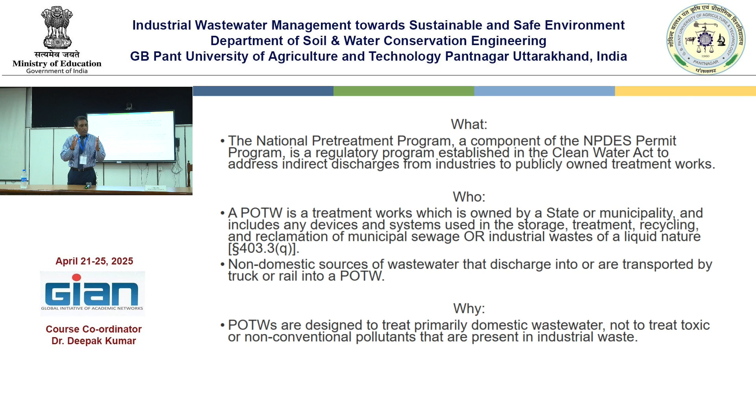That's one. Number two is when you design any wastewater treatment plant, it depends upon the type of industry existing in that area. We also saw there are two scenarios a city can do, whether it is delegated or directly managed by the administration. In one scenario, domestic wastewater from the residents is treated and discharged depending upon the location where they want to discharge. In another scenario, you have a lot of industry, and it is just not possible to accommodate with a municipal sewage treatment plant, so that is why we construct a different plant specifically to treat industrial wastewater.

We have also seen how the scenario is here. You might have seen this is a common effluent treatment plant where all the industries are located. They collect the wastewater, then they send it to common effluent treatment.

But we also saw what are the issues with the small and medium industries. They cannot afford to have a big treatment plant. There are many issues. That is why when you make regulations, when you make planning, you should also understand the other side. If they are not connected to the sewer system, if the sewer system is not capable, if it doesn't exist where they can discharge, if their discharge is not continuous, if it is intermittent, if it is seasonal — all these factors have to be taken into consideration when you design.

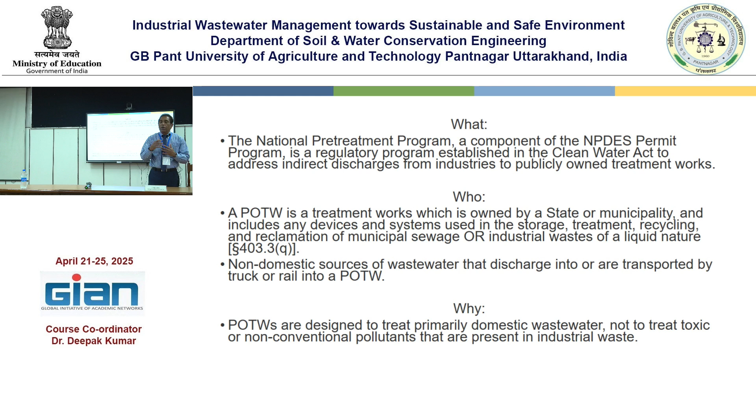That's why each city and town's design of treatment plant is different. I said the limits are developed as local limits. How they are developed not only depends on the standards of the state. That's why we give a little leeway for the city/town based on the existing industries, and the scenario they can decide, and local limits are developed accordingly. How they are developed is not a reference to the city, even though we say city local limit — these limits are developed based on the treatment plant capability. We say that these are the set limits, that's just a kind of understanding.

Then we also saw the scenarios where we have to treat the wastewater coming from the industries. In addition to that, it also develops sludge. We talked much about how to dispose of the sludge, what are the issues with sludge, what contaminants are in the sludge, how the sludge can be converted into manure, in what circumstances it cannot be used as manure, and how you remove thickener and other various components. We saw that. So that was all.

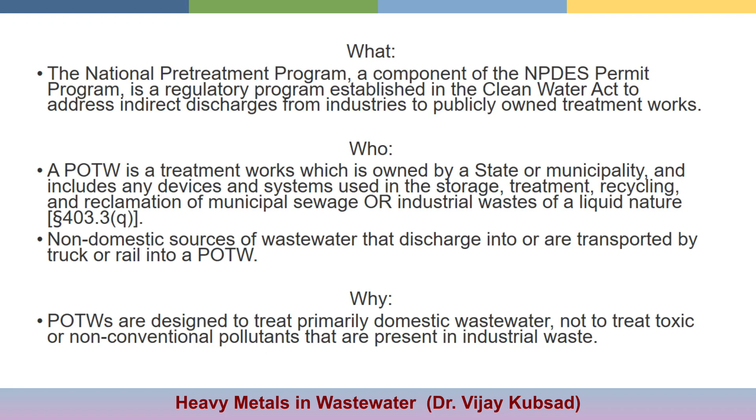But today we will see the importance of taking care of the wastewater when there is a presence of metal. Then we will go for biological treatments.

So here, if you see the national pre-treatment program, or any pre-treatment program applied to any location, statewide or the national pre-treatment program, a component of the NPDES permit is a regulatory program established under the Clean Water Act. So it started with the Clean Water Act. This is the model which they developed for the nation, then it is applied to different states, different cities, towns accordingly. So that is the treatment work which is owned by state, municipality, or includes the devices system used in the storage, treatment, recycling, reclamation of either sewage or industrial wastewater.

Liquid in nature, there may be domestic wastewater, it may be non-domestic. That's why we call it more precisely non-domestic. So any non-domestic will go there. Sometimes they say we produce wastewater similar to domestic wastewater. So domestic wastewater is that which comes from residents, then the rest is non-domestic and industrial. What is the difference between domestic and industrial wastewater?

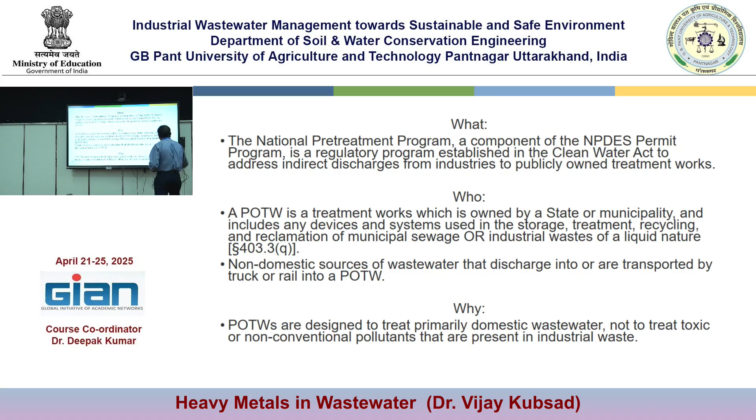When a domestic wastewater treatment plant is there, called a sewage treatment plant, we have little provision for that. That is why industry must pre-treat, removing some of the pollutants. That is their responsibility, so they can make the wastewater acceptable to the receiving community. The system is designed to treat primarily domestic wastewater, not toxic and non-conventional pollutants. That we have to always keep in mind.

Your first job as an administrator—tomorrow you will become a plant manager or a city authority—your first job is to protect. That is why I always emphasize you have to do your job correctly. Otherwise it will cause severe issues everywhere.

Toxic pollutants can affect the efficiency of the microbial process at the POTW, reducing treatment capability. Gases and vapors from volatile organics can accumulate in the head space of the sewers—you have seen that example. If industries are discharging oil and gas like that, there will always be vapors depending upon the type of pollutants and gases, and it may cause an explosion in the sewer line.

That is why you have to make sure that all industries discharging wastewater to the city have taken sufficient care. That is why you give authorization—that is the privilege. You say you will accept the wastewater, but under following conditions. That is how you confirm: you do sampling, you do analysis, you find out the data, and based on that you make an agreement—this is what we can do for it.

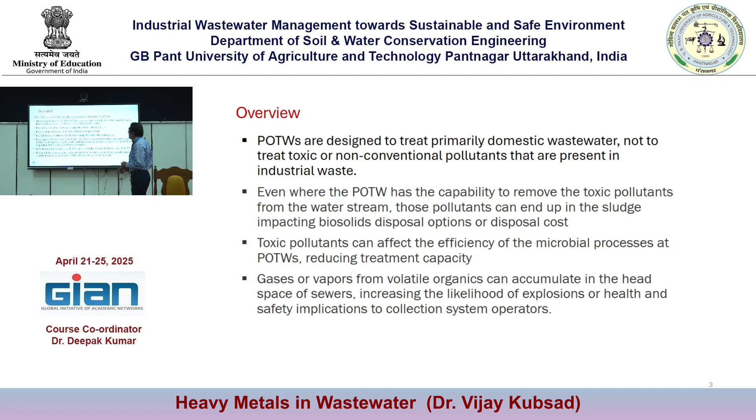Then we have some emphasis on the Clean Water Act, when it came up into regulation and what it consists of. It is the primary federal law that regulates water pollution, restoring and maintaining the quality of national water bodies, preventing, reducing, and eliminating water pollution, establishing conditions for discharge of pollutants into waters, developing a toxic pollutant list containing 65 entries deemed toxic, and we also developed a derivative list titled priority pollutants.

I spoke a little bit about priority pollutants yesterday as well. Then they published analytical testing methods to be used by manufacturers in determining the presence of chemicals and their toxicity. What does this do? If we have a law, only then can you apply it, only then can you prevent discharges—you can see the importance. So if you want to take any action, you need a clause specifying under what circumstances you can take action on violations. You just cannot decide on your own.

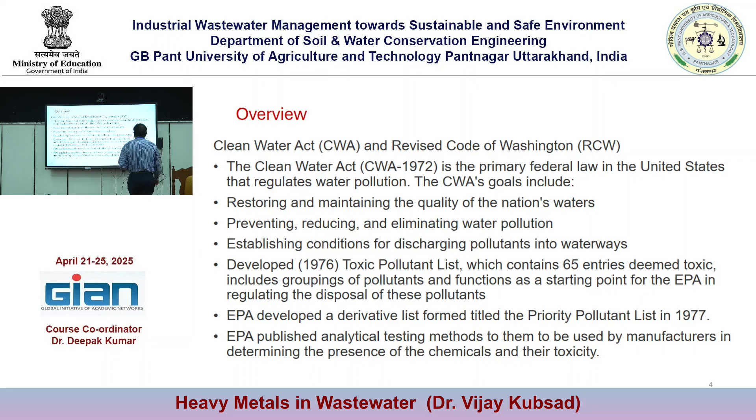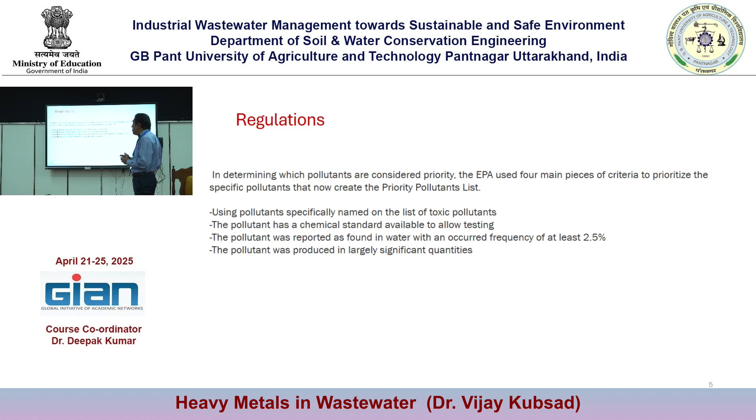Only that has to be applied precisely. So regulations give a list of toxic pollutants. If I say toxic pollutants, there should be some list, right? You need some guidelines, a manual. And what are the rules, where it can be applied, how it can be implemented, all that has been put into it, is it? So definitions, interference, pass through, and what are the other pollutants?

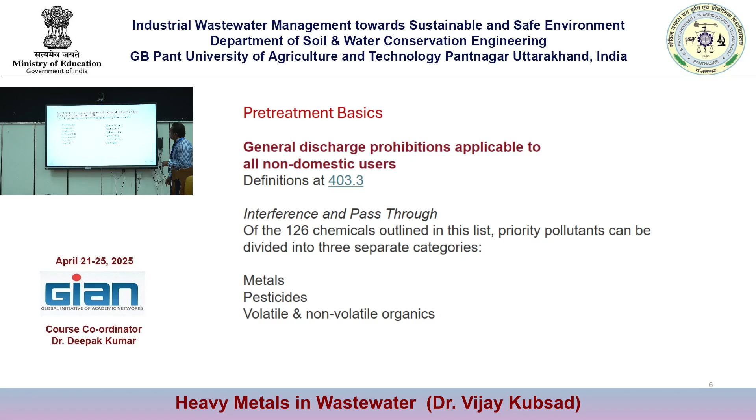There are three major categories: metals, pesticides, and volatile and non-volatile organics, right? What are the common toxic metals which can cause detrimental and harmful effects both to the environment and human health?

Right? We talked about some of the contaminants, metals. Yeah, one of your colleagues was talking about chromium. A couple of people are working on chromium. See, if that is present in the wastewater and not taken care of, what will happen? It will start destroying the whole system that has been built. That is why it is very important.

So I want to go a little step back. Earlier, what used to happen is, you might give an example - we used to drink river water. So you might have also heard about stream purification. Whatever treatment you are doing here, it all exists in nature. We have a sedimentation tank there, we have aeration. When the depth decreases, it becomes aeration there. When there is a big deep pond like terrain, it acts as a settling tank. Everything is there, is it? That is how it used to happen.

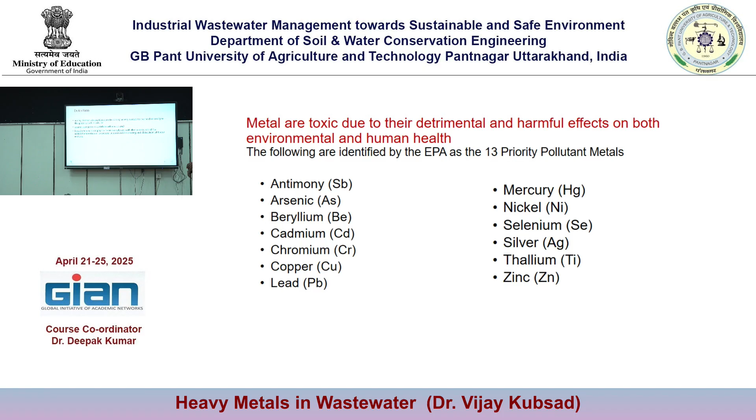Detection using atomic absorption spectroscopy - yeah, we have given a little bit about how these metals are analyzed, and what equipment is used in the system. Gas chromatography - I have used this gas chromatography for many years. If the concentration is small, most of them are doing PhD, masters, right? You might have used this kind of equipment. So these are the equipments widely used in the analysis.

And also you have a guidance document which has been developed - standard methods, okay? Standard methods. And now there are pollutants we do not know how to analyze. Those are not there in the standard methods. Still, we are trying to find out which must be the appropriate method to analyze.

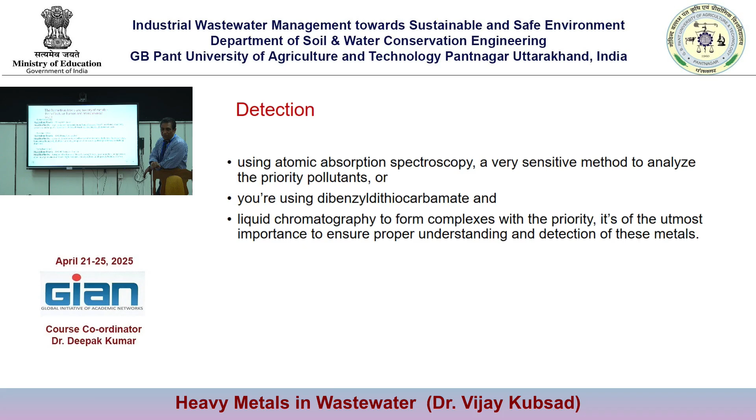Hazardous level, toxicity of the metal, and their effect on human environment - I have told you, I have one slide where you can see what is the effect, what happens, right? So you can see the effect of these metals if they are entering into the environment, into our ecosystem. What are the side effects here? Right? So you know about arsenic, somebody was talking about arsenic also. Right? Arsenic hazardous level...

Antimony hazardous level is given. Health effects, you can see - we're all inviting these kinds of health effects. So unless you fix it, how much medical infrastructure do you want to develop, keeping these things in mind, right? That is why the role of people involved in the environmental field carries a lot of responsibility.

People are getting more attention. That is why wherever you have the opportunity, you should be able to speak, make people aware, implement the regulations, educate the people, understand the latest technologies which exist or are developing, so that you can implement them.

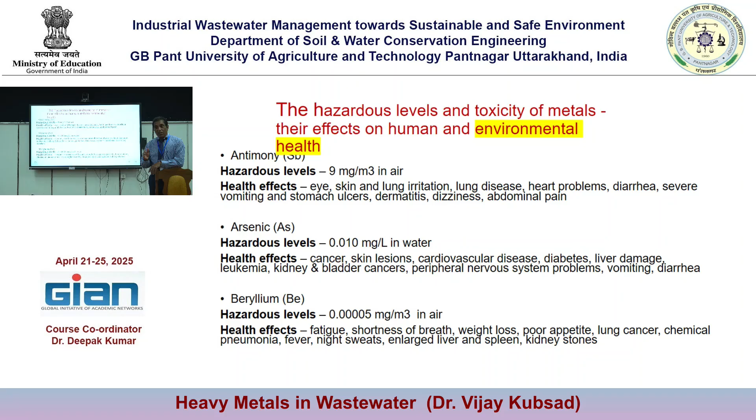Arsenic is also a big problem in major areas. Earlier, before DDT and all, I think people were using arsenic as a disinfectant or like that in the farming, right? And you know the health effects. How do you want to let these things flow even though you know? If you don't fix them properly at the basic level, if you are building big infrastructures or health infrastructure, how are you going to fulfill the purpose?

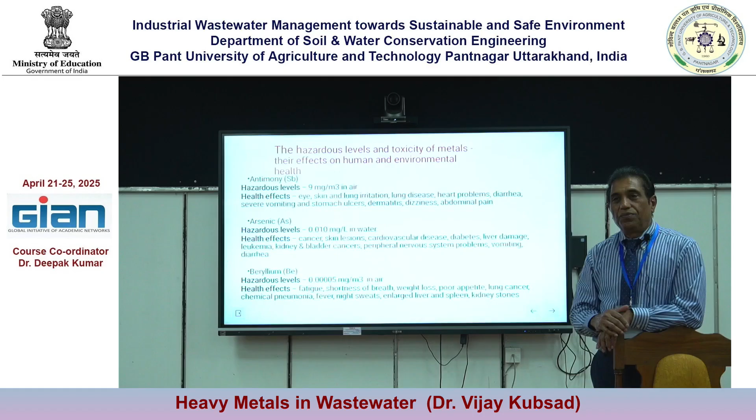That means you are knowingly doing these things, right? Prevention is always more important than repair.

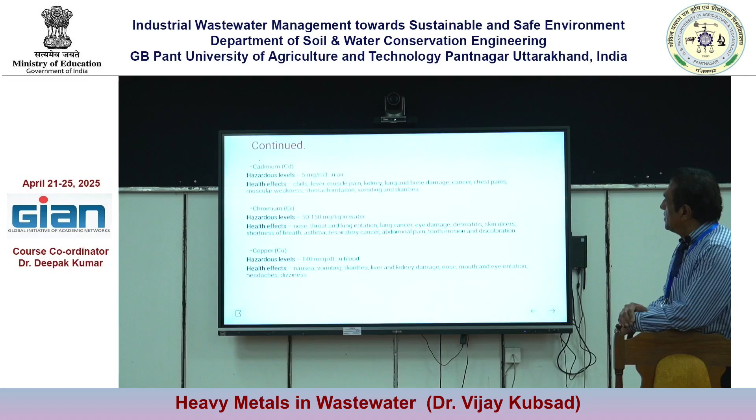So cadmium, chromium, and copper - copper in small quantities is okay, but there is a limitation. We drink water through copper pots, but only to a certain level. The hazardous levels, health effects, how difficult it is - you guys are in the field, you understand what these contaminants are.

But even many educated people, if you ask them, won't have an idea, right? That is why it is important to understand where we are at. I had an incident where the city wanted to liberalize lead limits, but I prevented that. That is what you will have to do, because industries always want to plead, since as the concentration of removal increases, the cost of treatment goes up.

If you want to see the turbidity reduced from 50 to 20, it is easy. 20 to 10 is a little difficult. 10 to 5 is still difficult. If you want to make it almost 1 or 2, or 0, it is still more difficult.

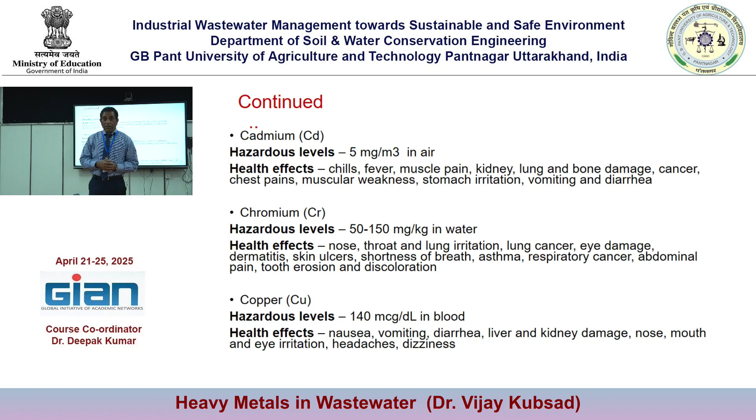It is not necessary that they may not be knowing. Whether they are doing it knowingly or unknowingly is another aspect, so that is your concern. If unknowingly it is happening, then you can sit together.

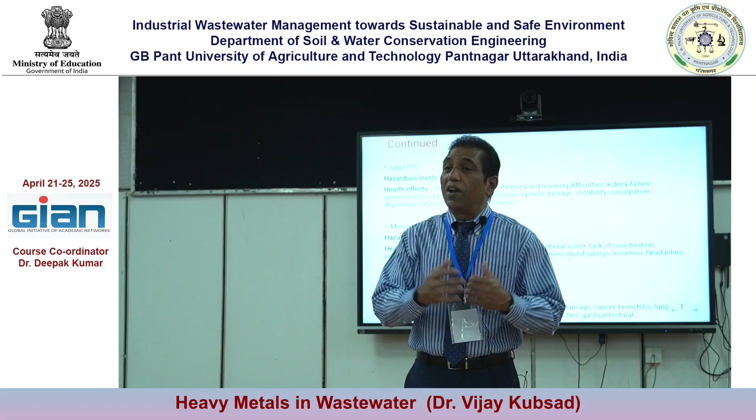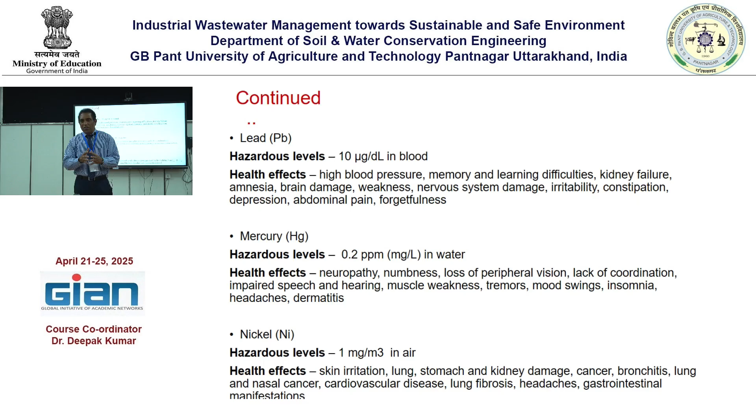It is not something like two different bodies where you always do enforcement and they do something else - it is not like that. Some things they may not be knowing, but there also people change. You require all the stakeholders to be together to make it successful.

And you need industry also to grow the economy. At the same time, your responsibility is to make sure you have achieved the water quality standards and your environment is sustainable and safe. That is your responsibility - everybody has to do their job properly individually. That is the very intent of why I have given this slide specifically to understand, right?

How important is your numbers analysis - it should not be a sudden thing. The environment doesn't happen suddenly, it has a lot of capacity over decades together, and nobody notices. Yesterday I was very happy - people were talking, and one of our professors was talking about the burning issues in the river here, and we were discussing that it doesn't happen all of a sudden. That time nobody noticed, and today suddenly everybody is talking about why it is so.

I also heard there are a number of treatment plants, and only 10% of the treatment plants were working, and the rest were not working. Then who is responsible? The things which are built specifically - how will you justify this?

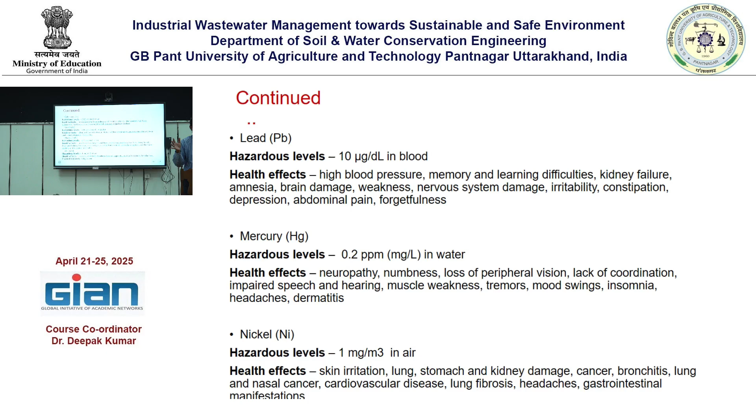So that is why you should always look at the pollutant of concern in addition to just BOD and COD. Other people talk, but you are core environmental people who are much more aware about water quality analysis data. Your lookout should be something different - you look from a different perspective. It is not that your aim is just to spend more time on the very generic pollutants, right?

But you should also see the priority pollutants. Can you find the sources to figure out how it is? So that's why you have to learn this analysis. That's why an accredited lab means what? It has certification, it has all the capability - trained people are analyzing, and they have modern, accurate equipment.

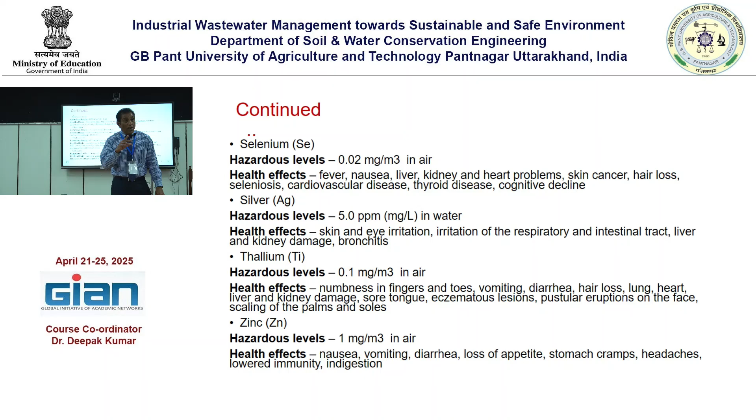When you ask about the data, always see whether that equipment is calibrated or not. Just don't take the data. And if one of your assistants, or tomorrow a group of people will be working, always have a double check. When you are making a major decision, you have to make sure your data are right, whether it is done properly.

Otherwise, what happens? The whole thing will go wrong. If the doctor diagnoses wrongly, what happens? The disease which has to be treated will remain, and it will cause another disease. Similarly, that is why you should understand the data thoroughly.

Just don't design even the models for just 1 or 2, few months of data. Make sure those data are very important. That is the language of the wastewater, how it is performing, what it consists of. Then you make a decision, okay?

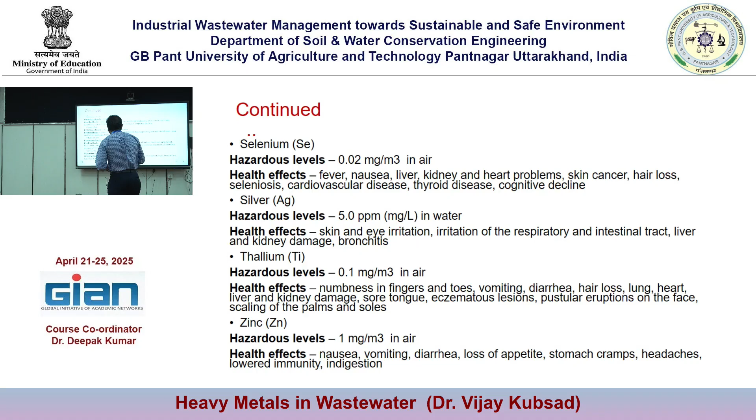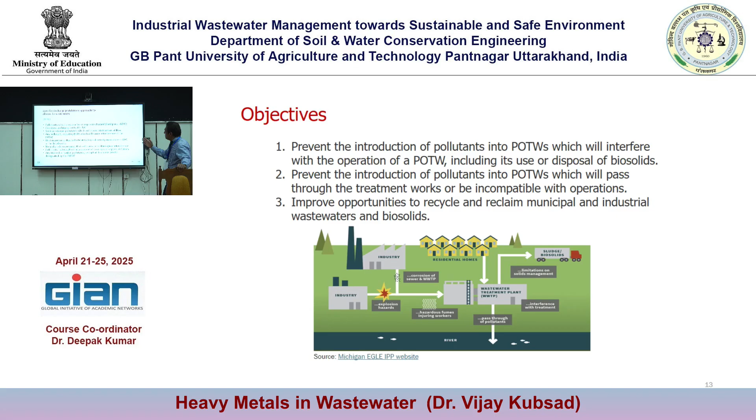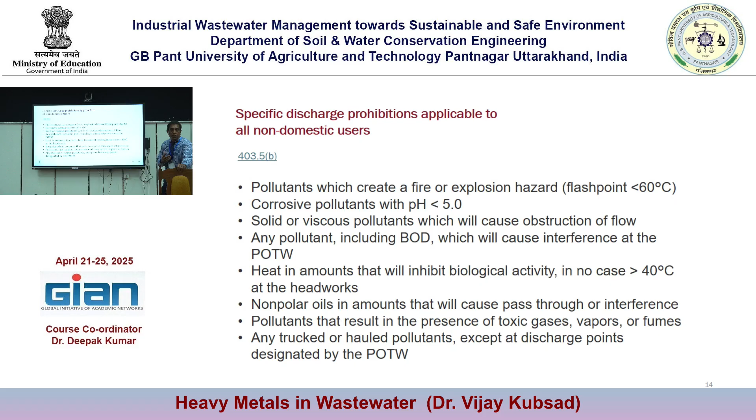Specific discharge prohibitions applicable to non-domestic users. What are the consequences? Pollutants which create a fire or explosion, flash point should be less than 60. Should also be aware of the regulations.

It is not necessary to keep in your memory all the time. That's why we say operation and maintenance manuals, and different manuals were involved in developing many manuals. So those are important. You can read through, you can compare, you can see how the things are there, whether there is any requirement to change the design in the beginning. That is all can be done, right?

Then solids, pollutants which will cause obstruction of flow, that we have seen. Oil and grease in the system will cause a problem in the sewer system, it will cause a problem in the treatment. So that is why heat in amounts will inhibit the biological activities. That is very important. If you allow any industry or any discharge which has high temperature, the biological activity will be spoiled. They are sensitive to temperature, right?

How people are sensitive, they are also sensitive. So that is why, because the biological process, once it is disturbed, it will take a lot of time to come back. It is not just in a day it happens. So that is why it is important to make sure.

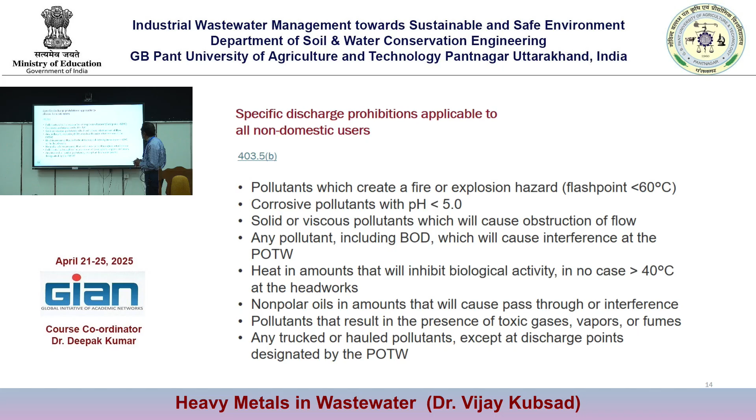So the consequences you have already seen. What are the consequences if you don't analyze the wastewater entering into the system? The pH is also there, it should be within range to have a good biological system, and a non-contact cooling water in significant volume.

Non-contact cooling towers, you have big cooling towers. Everybody wants air conditioning. You need air conditioning in the company to maintain certain products, certain raw materials, central AC. That's why they contribute. They are considered as non-contact cooling water.

What is the main contaminant in the cooling water? TDS, total dissolved solids, is the contaminant. So you cannot just put an enormous quantity of TDS in the wastewater treatment plant. BOD is a biochemical oxygen demand that you can treat, bacteria are well trained for that, but TDS may spoil the entire game there. So that is why you have to make sure that the TDS is in line.

Then regarding industrial discharges, which may be direct or indirect into the system. Significant industrial users, as I said, discharge on average more than 25,000 gallons per day, which is about 4 times, 100,000 liters per day. If that big volume is coming, you have to be careful.

They should have this, because it may cause slug loading. A sudden big volume of wastewater entering can collapse your biological treatment bacteria. So those things are important for the industries to look at: hydraulic loading, organic loading, pollutant of concern.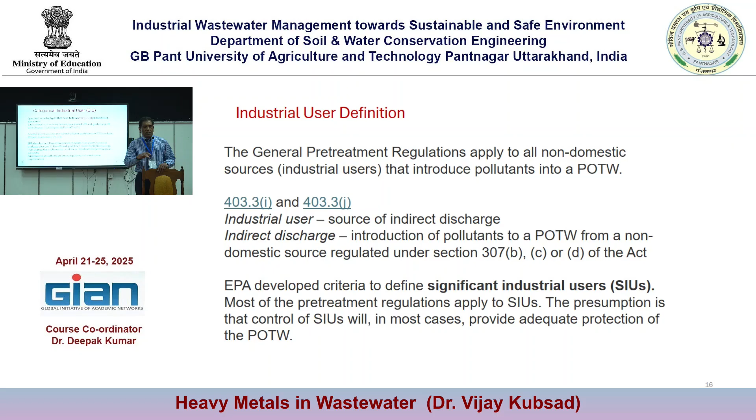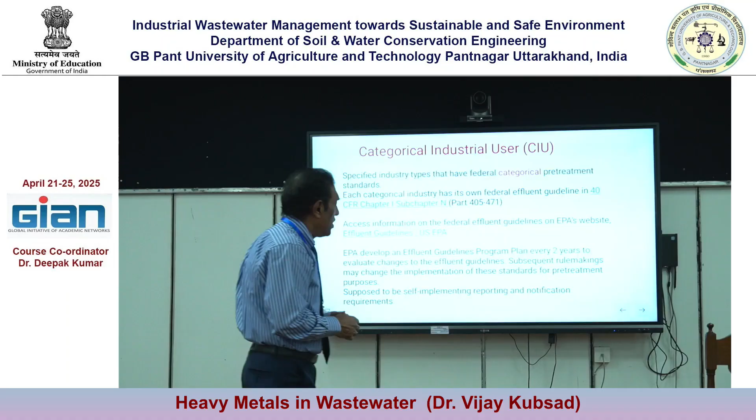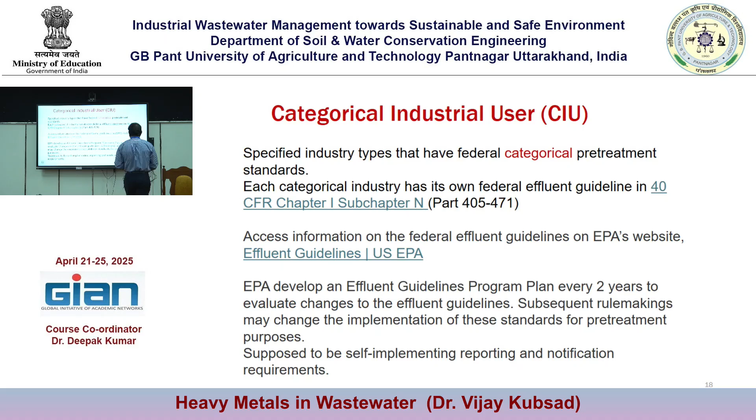Categorical industry, we talked a bit about it, like metal industry, metal finishers, with contaminants difficult to remove in our system. So there is a system defining what industries produce these kinds of metals, these kinds of pollutants of concern, categorical industry. There are guidelines on that, which you should have, so it is easy to understand the source of the contaminant.

I want to give a quick flash on what industries come under this. You can see we were talking about aluminum forming, asbestos manufacturing, battery manufacturing, carbon black manufacturing, copper coil - all these industries come under categorical industry. So what is the difference between significant industrial users and categorical industrial users? Categorical - the volume may be small, but more contaminant.

These are the industries you come across. Many of you have worked in this kind of industry, so you should understand the gravity of the issue. And petroleum refinery industry - today we are more concerned about fuel, we need fuel for our cars, and you should also understand what it contributes. It is an issue if the industry is not taking care of what they are producing.

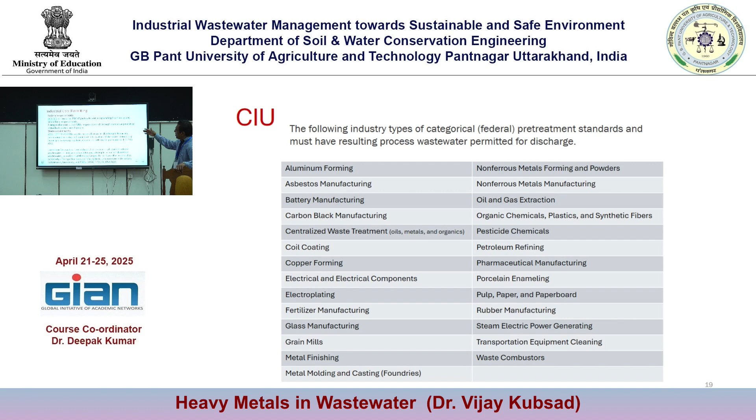Then there are three layers. We talked about the federal requirements, state requirements, commercial, industrial, residential, and the different sources from where the wastewater enters the treatment plant.

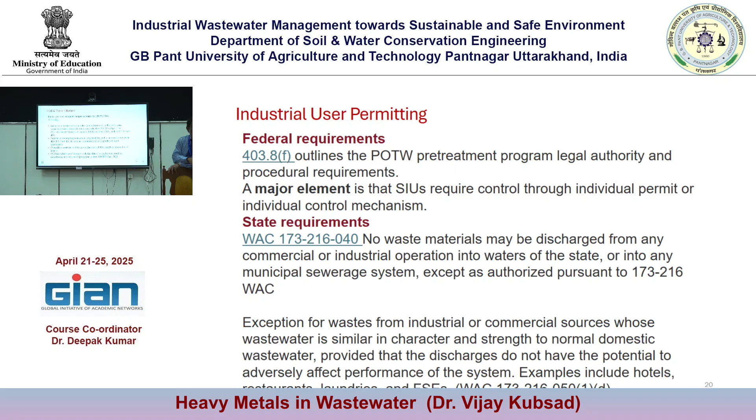What are the requirements to apply the pre-treatment program? Then you should see the location of the industries and the capability of the treatment plants, what your local limits are, how much it is able to treat, what are the pollutants of concern, in order to maintain whether you have the resources and analysis to maintain the public infrastructure.

If the wastewater treatment plant is there but not working, what does that mean? How is it built? It is built by people, money only.

All the people existing in that place or everywhere, they are the stakeholders, right? You have invested there and it is not working. How is that fair? You have to provide written technical evaluation of the need and revise the limits, right?

Technically, you will have to evaluate. Next lecture we'll study about the biological treatment. You have different units, right? We'll study in detail - grit chamber, primary, secondary, oil grease trap, secondary, disinfection, and then discharge. You should make sure each unit is working properly. It's not just influent to effluent - if the water is just passing through without any removal, you have to make sure each unit is efficient or not. That's the big responsibility.

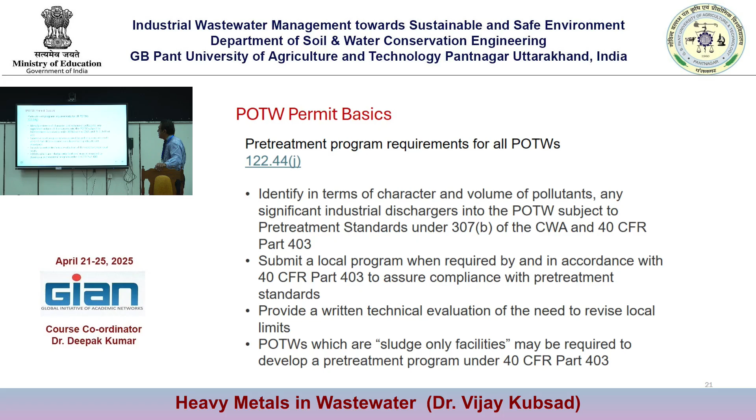The purpose - what it is built for, whether it is doing that or not, right? And the sludge produced - where it is disposed of, how it is disposed of. All those things, all components of the wastewater products, have to be analyzed properly.

What are the rules? How is it established? For industrial users, we have different users and the control program, and what are the various components - interceptor, silver control, mercury control - all has to be there. When you do a survey, you should understand what it is producing, right? What do you do, how will you understand that?

If suppose a small unit came into your town, and you are the officer, what will you do? You will investigate and find out - what are the products? What are the raw materials used? How many people work? How much water is used? How much wastewater is produced? Where are they disposing it? How are they disposing it? All has to be analyzed. Then you can make a decision.

If he is just starting something and discharging, who will do that job? What is the job of that unit which is built for? Then you will say, okay, if you don't want to build a treatment plant, it is fine - you collect everything you produce and take it to another place. I have several examples like that. I have done it - no, you can't do that.

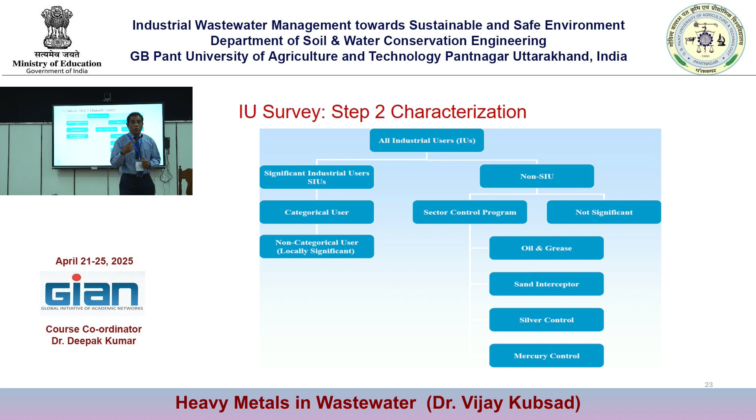You are in a hurry to start the thing, not doing what is required. Inside everything is air conditioned, but when the wastewater comes out, it is just left outside. Everything inside is good - who will take care of the outside one? That is why these are the basic things which have to be dealt with.

General prohibition, specific prohibition, categorical standard, local limits, best management practice - there's a small aspect in it. At the same time it is required, but your aim is not to stop them, your aim is that they should take care of the stuff they produce, right? That is why best management practice matters.

If a small unit is there, I gave you an example - if there is a small car wash unit, you give them a best practice. You establish these guidelines, then you start doing it. You should know where it is going, how much they are producing, what they are doing. That is what you have to observe and take action on. So you have several tools for how it has to be done.

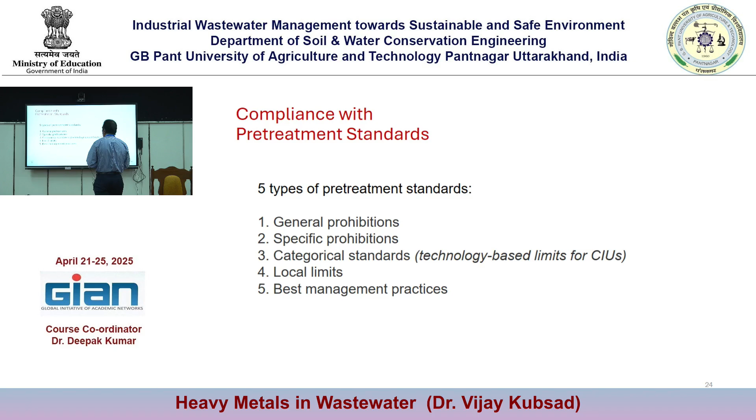That is why it is built so thoroughly so that there is no chance like that. If you do anything, you will go on improving. When you make a document, you will read it 10 times, 15 times, 20 times, make it more consolidated, compact, well referenced. You do not prepare one at one strike. That is how these things are built, but somebody has to take a step forward to implement it.

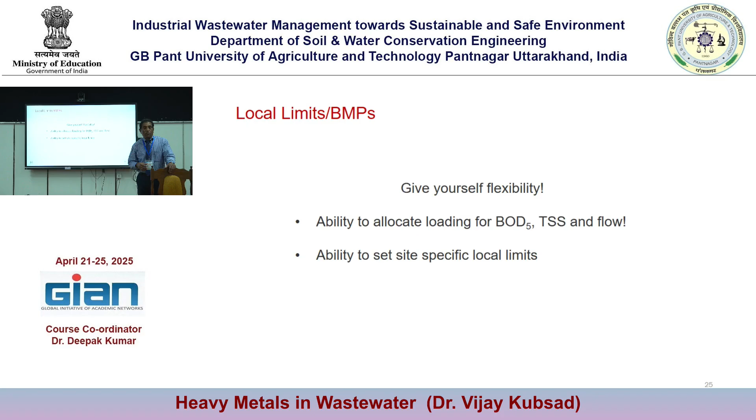For example, ability to allocate loading, TSS and flow, ability to set specific local limits. That is what we talk more about, the local limits involvement in taking care of water quality. Control mechanisms are in place where you have to make sure that things are done properly.

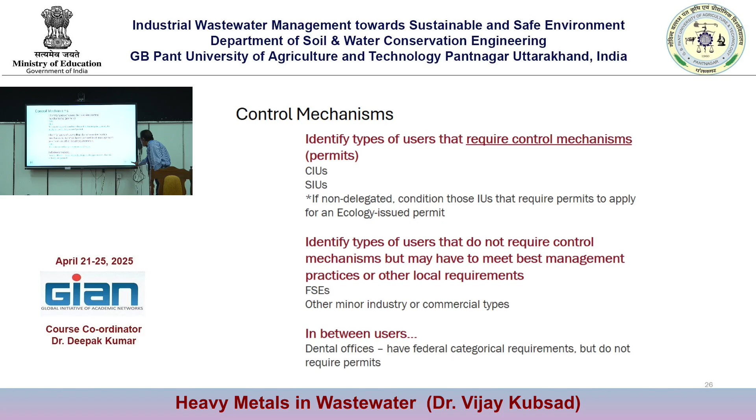Then right to entry, this is another thing. Any official cannot just go and enter anybody's premises and start doing things. That is the right of entry. That is why when you come in there, you have to take permission. There is a process for how that goes, which is why you give an authorization. When you give authorization, it makes clear that the controlling authority, the administration, has authority to enter your premise and do the inspection. That is required. If there is no documentation, you cannot suddenly go there.

That is why those are things to be considered from your side and their side also. Right of entry, surveillance, monitoring, in line with the right of entry requirement, provide information requiring the industrial user to respond to the survey on wastewater generation and characterization. This will assist the treatment plant in completing a robust industrial survey. That is why you have to do the survey, you have to start from there.

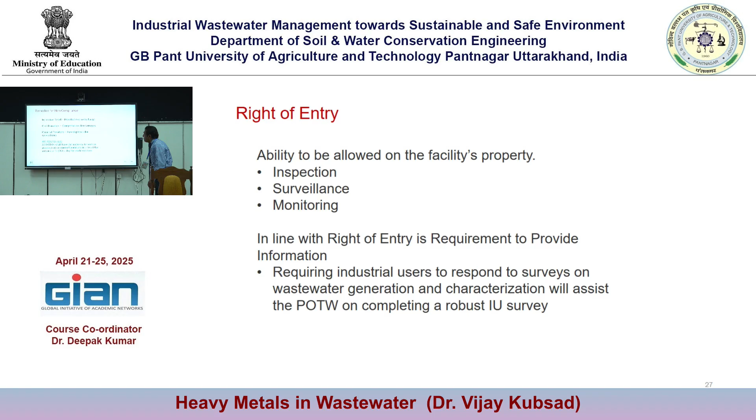Then the remedies, civil penalties, that is the next step. If you are doing your job correctly, everything you did, but nothing happens on their side, for that you need a law. I did all this, but this is happening, so this is the path we will go. Then it is the civil penalty, criminal penalty, and then court, all this comes into the picture.

Then you will have to justify, that's why your documentation and data analysis is very important. When it goes to court, if you don't have anything in defense to plead, what you are doing is wrong. That is why what you do, what you analyze, what you report, and how you know the legal system works, those things are important. That is why what you do is also important, how you document, how you analyze.

That's why you make sure the data which is generated is reliable. Why is data important in this system? Because you can make a determination. You cannot just say good, bad, better, they are not doing work. What does it mean? There is no basis for that. Right and wrong is relative. He will say, I am doing right. Another will say, you are doing wrong. It is relative, it may be right for one, wrong for another. But he may be doing it unknowingly or knowingly, there is no rule at all, or there is no analysis. That is why this data should be representative. We always say the data generated is representative.

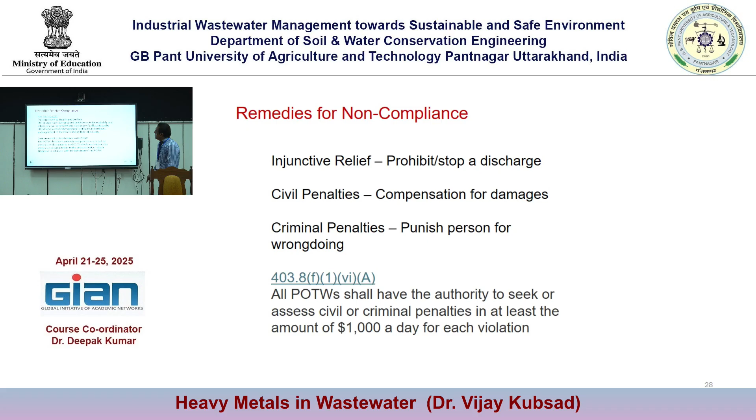Then health and welfare, remedies of non-compliance, environmental interference with the treatment plant, authorities, procedure, how to prevent discharge, they are always there. So if you are in a system and they are not doing things properly as required per the regulations and laws, you can stop, you have the right. We will not accept the wastewater. But that system should be in place. People who are receiving on the treatment side, these wastewater treatment plants, they have the right to say we will not accept it. So then they will understand. You need a law for that.

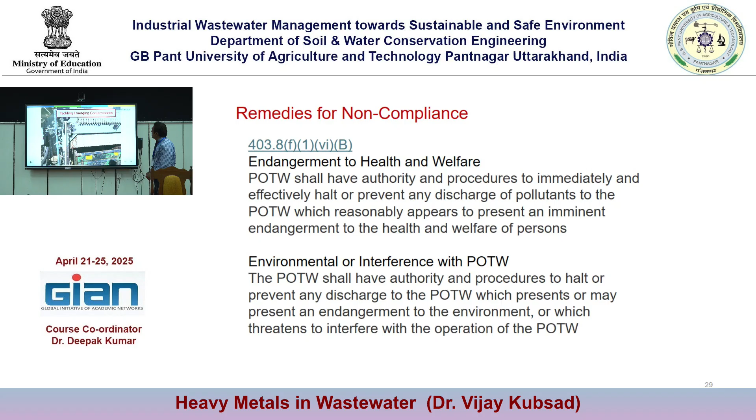I will give a little understanding about the emerging pollutants. So we are not yet there, we are on the way to having a big concern on this. People who are already may be knowing the consequences about that. So we'll talk a little bit about that also. Still, it is in the very initial stage. Identify the industries which contribute to PFAS. First, you will have to know the source, then you can find out from where it is coming. We will also come across what are these effects. People who have worked with organic compounds know the consequences.

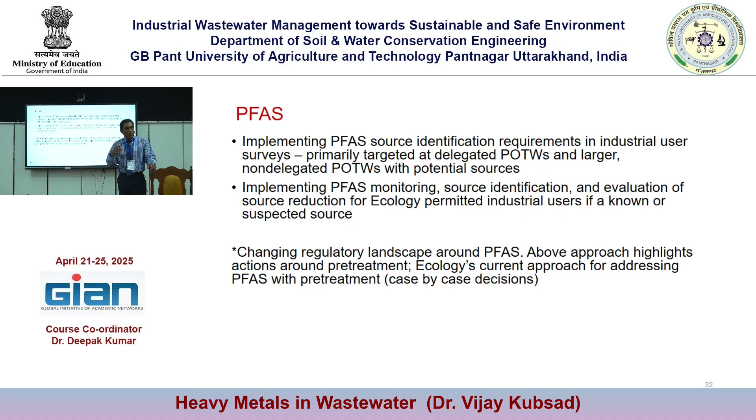Organic compounds like benzene, toluene, xylene - you have regulations for BTEX, right? Many things, if you do not know, how will you make a law? Who will make it? Yourself. If you ask anyone what are the pollutants of concern, you should have a complete idea, right? Then you can make it. In the beginning it may not be correct, but you will slowly improve. You will collect the data and make it. We'll talk a little bit about that. Any questions on this?

If they are not taken care of, they will start entering the water quality, water bearing ponds. It will enter underground reservoirs. It will enter streams, rivers, everywhere. If it is in the sludge, you cannot do anything. You don't have any other way to dispose it off-site except in the landfill. How much will you keep disposing of in the landfill?

You can also make it productive, but you build the treatment plant with an intent to create manure out of the sludge generated, because you are treating domestic wastewater, right? But if the metal is in the sludge, the very purpose of your plan is spoiled. What happens? You spend a lot of money to make that system work, but because of these contaminants, they cannot be used for that purpose. Then in addition to that, you are taking up space in the landfill. You see the management, how much loss it is.

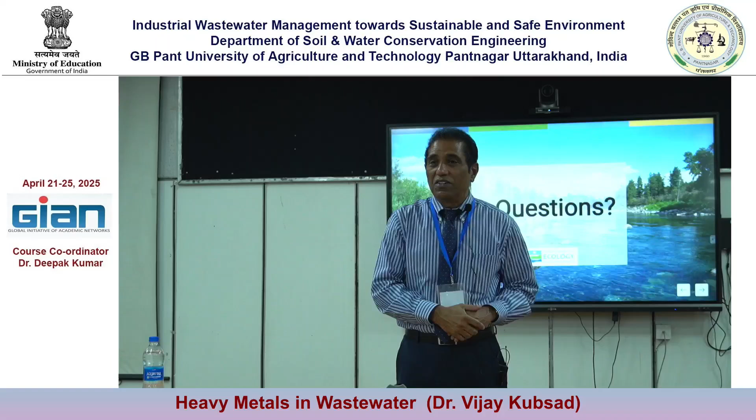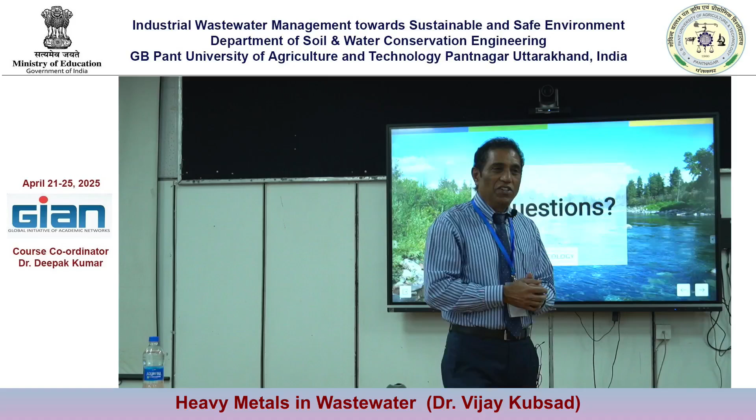Some people - ah, I agree. See, that is important, I appreciate those heroes who do that job. That is why I want you to be like that. Wherever you are, after learning so much, if anything is happening and you are not having a concern, just a person who knows the things but doesn't do anything, and one who doesn't know - both are the same, right? So that is why wherever you are, you should ask questions, you should find out, you should say something. I want to give you an example.

I was reading somewhere that one of the interns was doing some project on the lakes.

I think that girl was going to different areas, finding out how many lakes existed. Today we have lost more than 50% of the lakes. That's why you hear stories that there was a lake here when we were small. You hear these stories, but that is true, right? So the girl started finding out what are the lakes, what is the area. You will see the area of the lake is different in the system versus what exists now - there is nothing.

So the entire area is filled with houses around. We were smart in doing that, right?

So she started finding out, like some people - I appreciate some people like her - went to the press, went to the regulations, went to meetings, collected a lot of people, did the protest. Then people became aware. They were able to remove the structures that were built there, and some NGOs came up and started working on those lakes, and today you find a beautiful place.

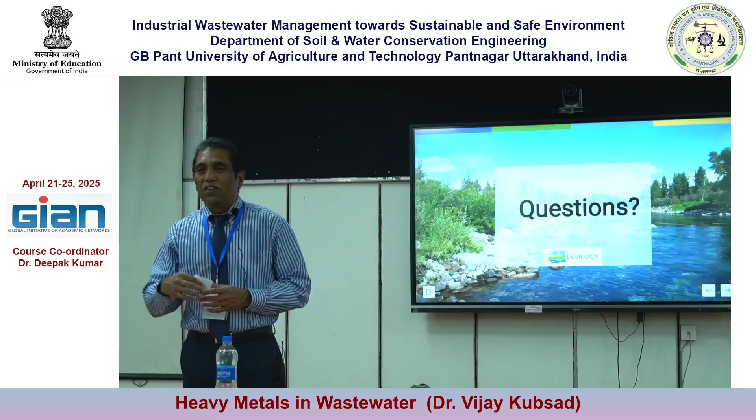Sometimes I used to write a lot of articles. I've written many chapters, of course journal papers, conference papers, and some articles. If you look back, you see at that time - you feel proud that you have done something and documented it. That is why it is important what you do, right?

Make it aware - how much impact it has, that is different. Whether it results or doesn't result, that is not your job. Don't be on the negative side thinking nothing will happen. It is in the environment - it is not like that, it takes time.

See, how long does it take to get polluted completely? Today people are talking about the river - after how many years? It took many, many decades, the spoiling. Today you are talking about it, right? And now all of a sudden everybody is active - they show plastic, make a picture, and give advertisements.